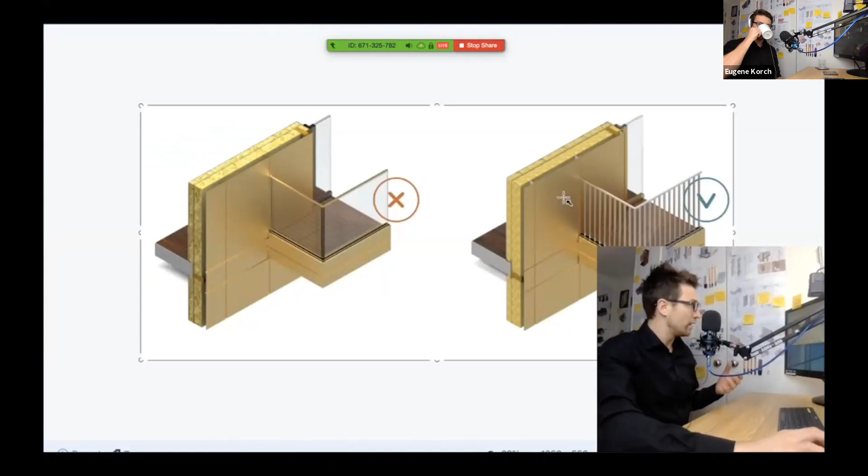Not everything about the balconies can be explained while you are standing on the balcony, but a lot can be explained via screen sharing. You see, from the legal standpoint, attached balconies are right now considered to be part of the facade. And that is why they need to comply with all the fire regulations. And that's why we don't have glass balustrades anymore. Laminated glass is not allowed, decking that can burn is not allowed, and combustible soffits are not allowed. That's why we have non-combustible decking, soffits, and balustrade.

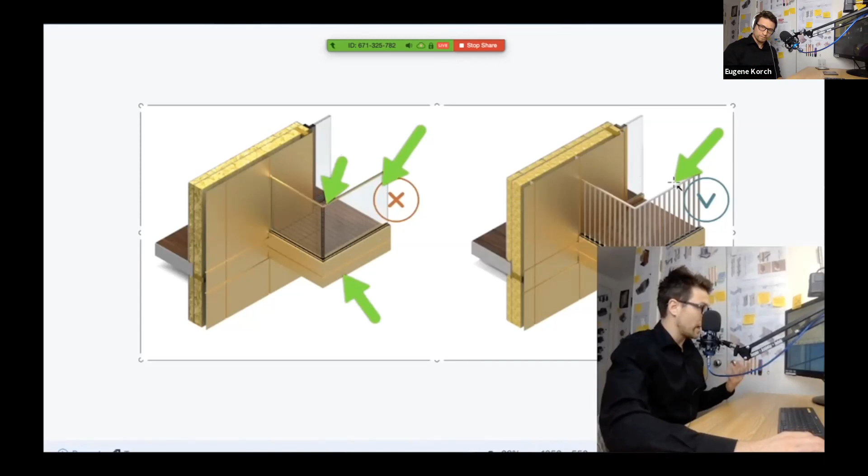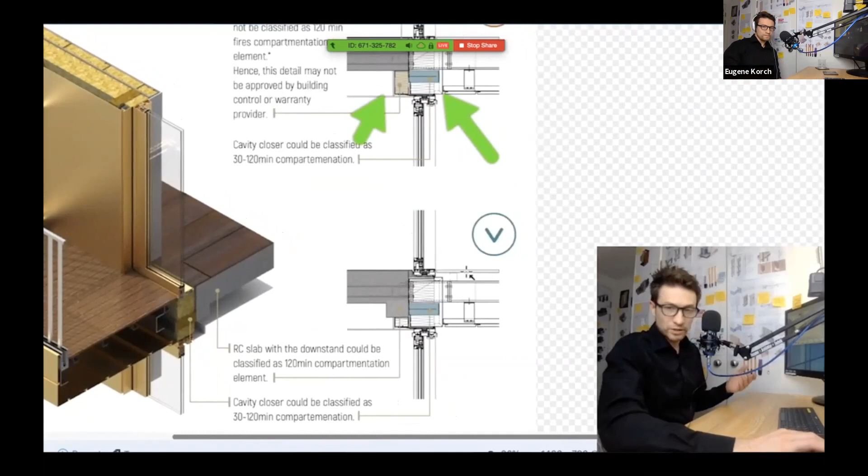But balconies also have to comply with all the compartmentation requirements. It used to be acceptable to install a cavity closer below the balcony to the SFS downstand, lightweight steel frame. Right now, best practice detail is to install the downstand to ensure the continuity of the fire compartmentation. So you can see on your screen right now the kind of widely used detail that we currently have in the UK. It's also recommended to overlap the cavity closers within the downstand zone, like shown on the screen right now.

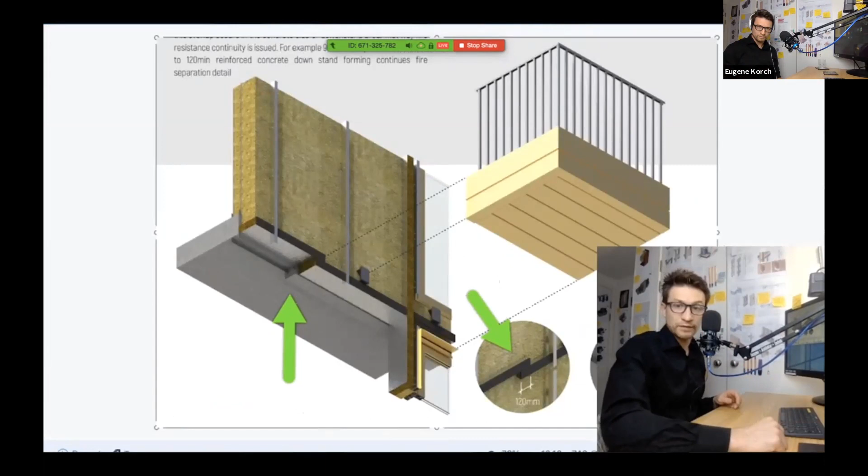Okay, so we've done a tour, we have shared screen. Let's have a test, shall we? Welcome to FAT Temporary Testing Facility.

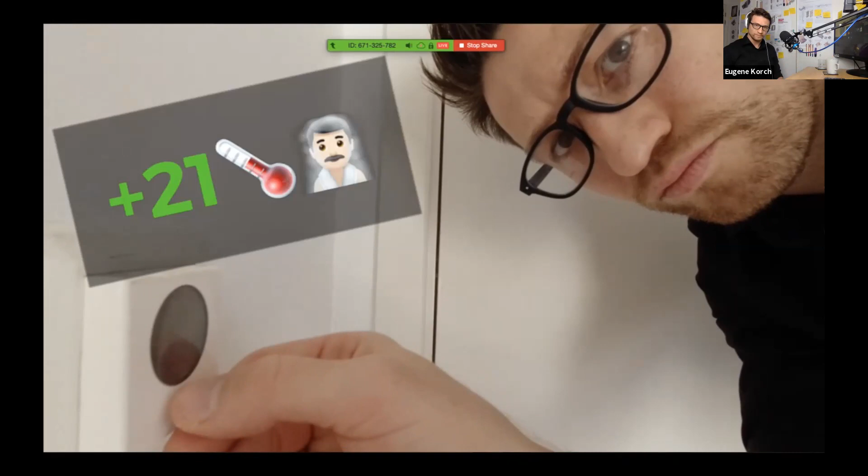So we have positioned this window in London, and we have cranked up the temperature inside to 21 degrees. And outside, as you can see right now, it's warm, but sometimes it is -2 or -4 on a frosty London morning. And we can see over here we have mold all around here, but also we can see the risk of condensation in the location of the bottom of the glass spacer.

This is a very common situation in the UK, and all the warranty providers are aware of it, and that is why there's new rules for condensation risk analysis in the UK with certain boundary conditions.

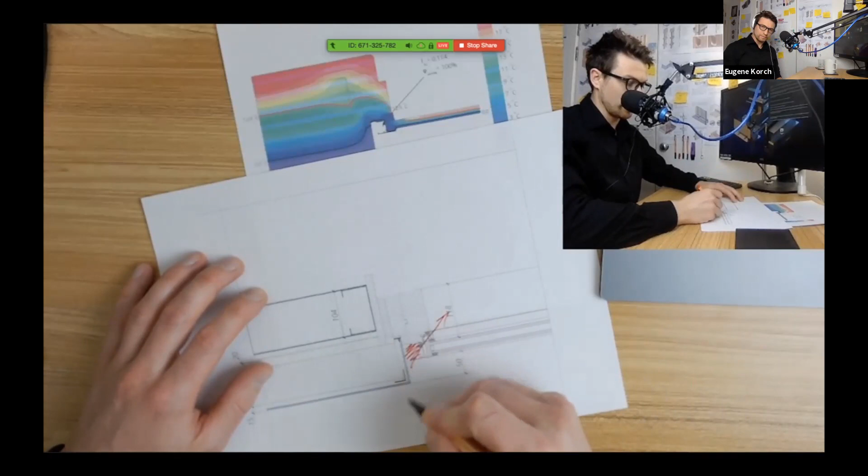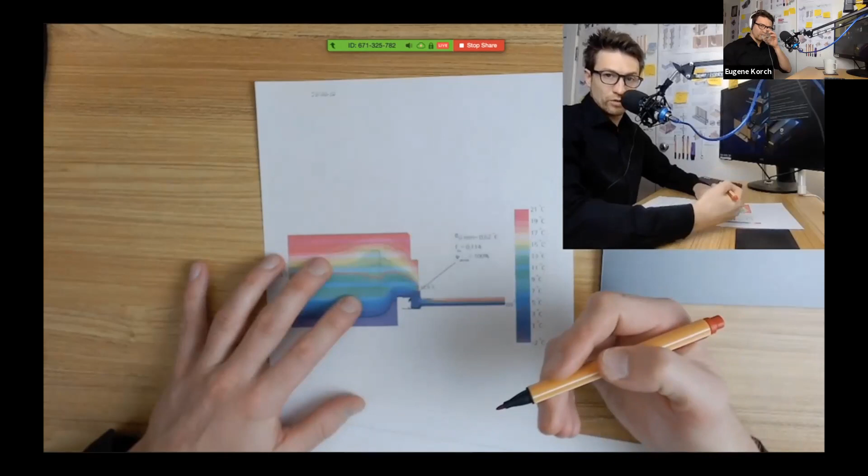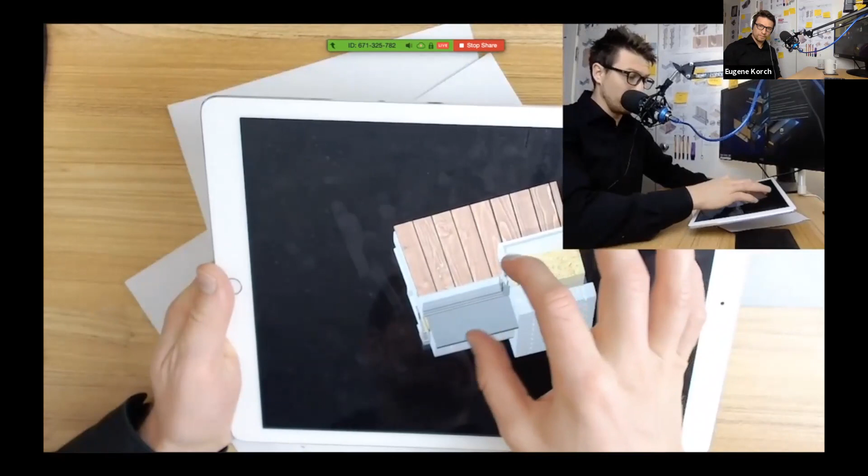And that is why the dew point is getting inside. You can see it over here. And all of that surface is compromised. There's condensation in this area over here. By the way, I'm sharing my desk with you right now, and that's one of the tools that you can do online. This issue could have been avoided altogether by slightly altering the detail itself.

As you can see on your screen right now, there's an interactive model of a similar building, but where this area was completely covered with insulation. So that's why there is no risk of condensation in that area here.

So I've done a tour, an experiment, shared my screen, shared my desk, used an interactive 3D detail, and all of that to communicate the design of the balcony, condensation and fire considerations in less than 5 minutes. The point is that you can pre-record your presentations and focus on question and answer sessions.

Hello. So basically, that was the presentation. I hope that everything was fine with the sound. Everything worked fine. Arvind can tell me if that was not the case.

So the whole idea of having the presentation in that format, of pre-recording it, is that usually it would take 45 minutes for a presenter to be somewhere on the stage or in front of a screen like that. And that will take 45 minutes to communicate a certain amount of information, even though most of the value is actually in the question and answer session.

And also, if you imagine that scenario where you're on stage and the presentation goes for 45 minutes, it's much harder for people to leave, whereas online it's less awkward to stand up and leave. Just click and let's go for the next webinar.

So that's basically the workflow: 5 minutes to explain something that would usually take 45 minutes, with the power of video. And going forward, for most people online, it will be videos, it will be 3D details, it will for sure be more interactive.

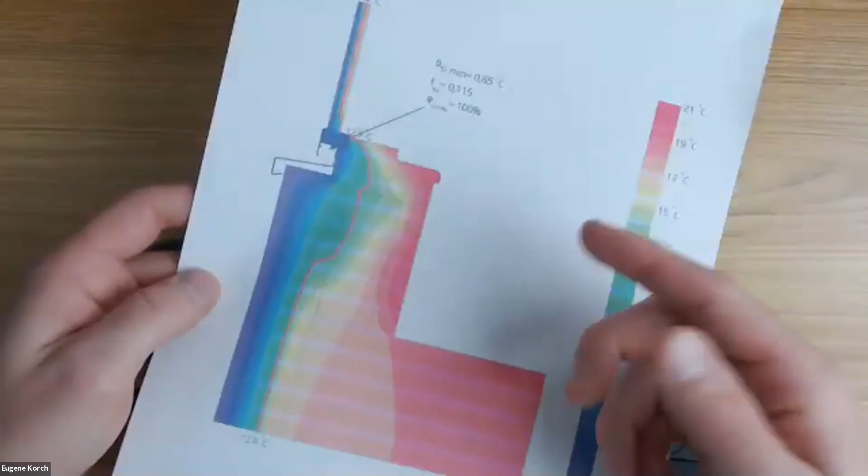So you can have something here. You can have a sketch that would explain a condensation risk analysis, the dew point, the boundary condition. You can have it in front of everyone like that. And if you're a hand sketcher, like I'm not, I'm horrible at hand sketching, you should be using something like this to communicate to people. It is very important, the type of communication. Facade engineering in general is more cultural than it is technical. And the way you communicate your ideas is very, very important.

Another aspect of 3D details would be that it visually represents all aspects of assembly to all stakeholders, and you can explain assembly quicker. It's not just nice looking images. However, that's something that people don't understand, that the way that we render them is not as important. And pretty much that's why we don't really show the entire workflow. We just show the snapshots of that workflow. For example, in that video that we have posted on YouTube, and I'll share the screen in a second.

Share screen. Sorry. Okay, I'll just switch off the sound.

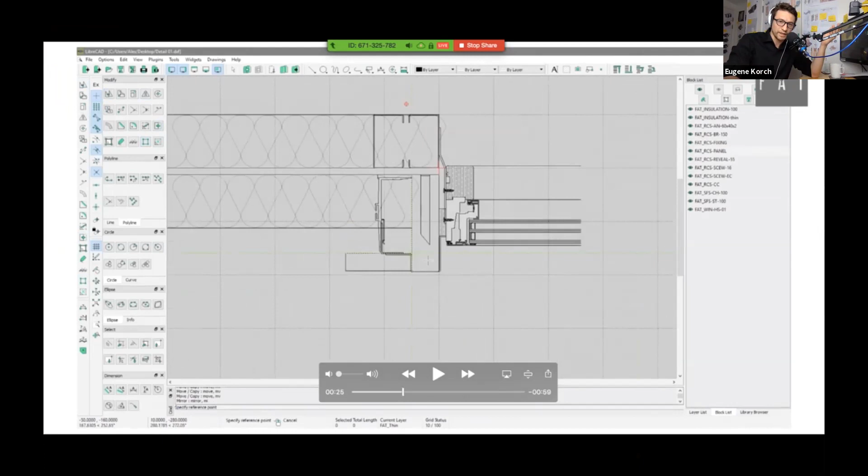There is no shortcut. If you want to use hand sketches, you can do that to test your ideas. But in general, we usually draw everything in CAD. That's always the case. That's how we think. Then basically you can design it in any software, and we'll come back to the software at a later stage when Tamas will be talking. And render packages, there's a lot of them. You can pretty much get decent results out of everything these days. We do recommend not to spend a lot of money and use Blender sometimes for visualizations, but in general that can be pretty much anything.

So that would be another question's answer. I will not answer any technical questions such as CLT and maybe the stresses in glass in this webinar. It's more about communication. But anyone can start asking right now.

So Eugene, 75% of the people have voted on the question which you had asked earlier. Which BIM software do you use? We have Revit at 36%, ArchiCAD 3%. Some people are still using AutoCAD, like you mentioned, 45%, SketchUp 5%, Tekla 2%, Bentley 1%, Photoshop 2%, and others about 5%. So clearly, the majority are AutoCAD and Revit, followed by SketchUp.

Okay, so our poll on Instagram worked out slightly different. 558 people voted out of 2,700 people who viewed. AutoCAD is at 22%, Revit 44%, ArchiCAD 20%, and SketchUp 13%. So yeah, between the two, AutoCAD and Revit, it's a split. So in theory, yes, you can do the 3D details in Revit, like we do. But I would suggest something slightly more open.

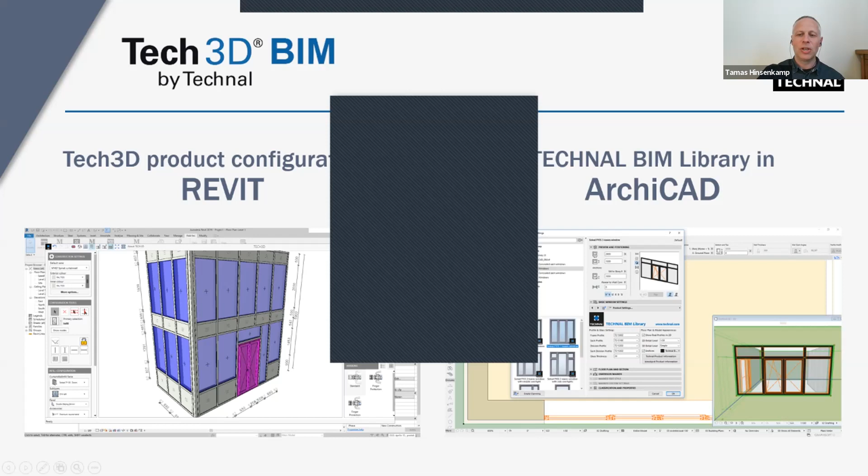Then I will show what representation possibilities there are in 2D and 3D, namely the level of detail. And then how an existing construction can be modified in Tech3D and replaced again in the project. After that, I will show how the products and the whole entire model of the building can be used in the virtual reality environment, and how this virtual reality can be used to sell flats, to show the possibilities, to show simulations, and so on. And after this session, I will go into details and show a few tricks and further possibilities of the software.

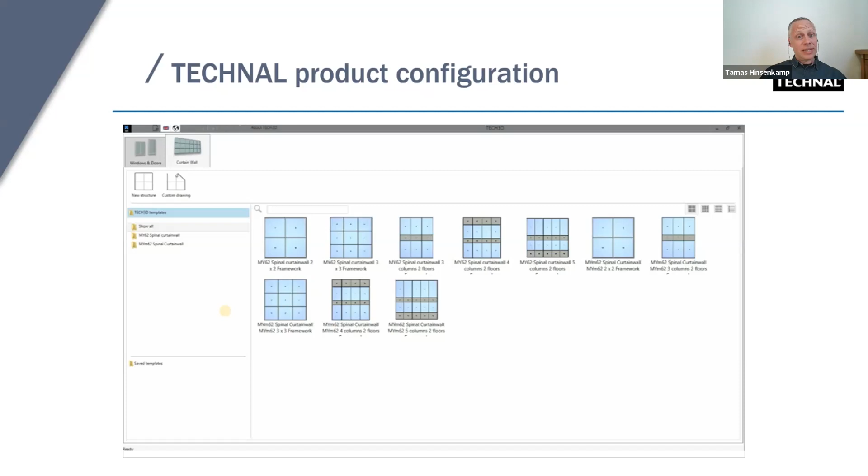Okay, and now I will start the presentation of the software. Just a few words on how this whole software started and what our original plan for it was. Tech3D is a simple configuration software which was originally planned to be used by architects. Anyone familiar with the Technal products, a metal builder or a facade designer, knows exactly how many pages the Technal fabrication and conceptual documentation contains. Across all the series of Technal products, we can talk about several thousand pages of documentation describing the possibilities, all the details of the construction, and all the options.

So our concept was that architects are mostly not familiar with this documentation and these options. So our goal was to design software that does not require as much knowledge about the products. We provide them choices one after another, and only choices they can answer. So we converted the decisions in the design process into architectural language, not asking about gasket names, profile names, and compatibility of the profiles and gaskets.

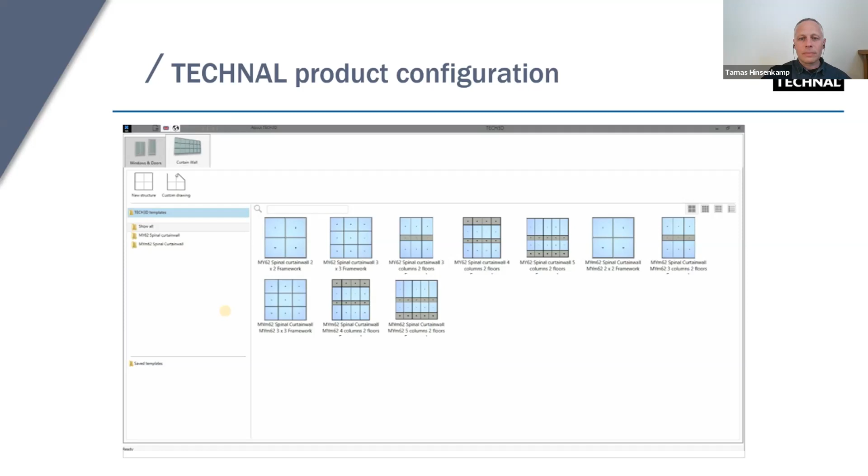So now the show begins, and I will show you the configuration of a simple curtain wall. So this is the TECH3D startup screen, the curtain wall part. Now I start a grid definition method where I enter the number of rows and columns. And now I enter the dimension of the rows I would like to modify. I can select components of this curtain wall anytime: profiles, infills, and all the other elements.

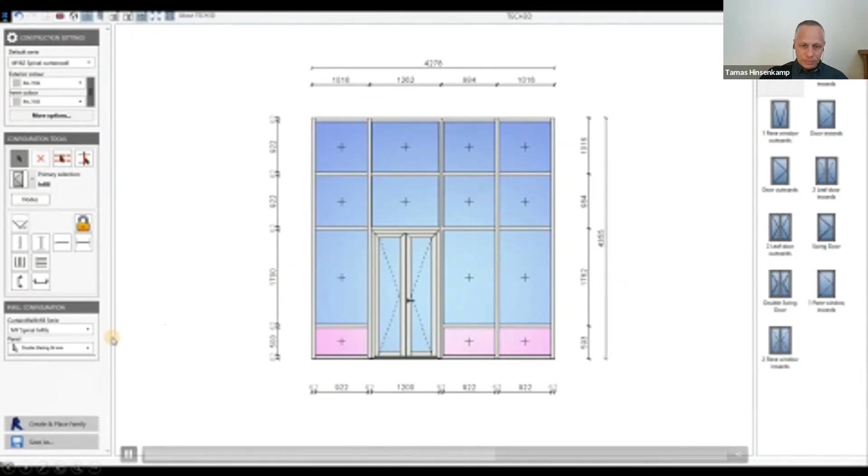And selecting it, modifying it, selecting and configuring it, I always have the choices on the right side of the screen, and I always have the possible tools on the left side of the screen. And you can see I made the geometry design at the beginning, then I deleted a transom, and then I placed a door, and now I'm changing a glass region to a panel.

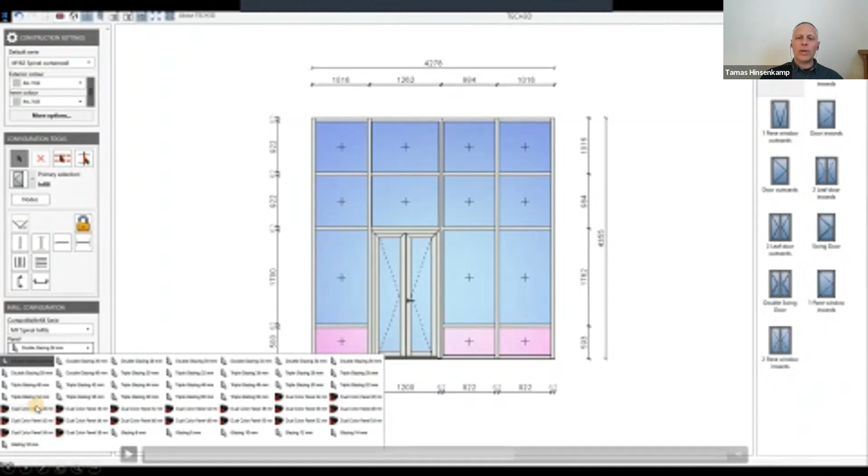At the same time, you can see also the choices of the different glass panels and also the panels. And this is the way how the construction can be closed up and modified. We always work with default values. So if you start a construction, it will be generated with default values, and these default values can be modified during the configuration.

You could see I can make selection of individual parts of the facade, or I can make global modifications. So for example, before I have modified the color of the entire facade, but I have also the possibility to select one profile and change the color of that, or change the profile reference of that cap, for example.

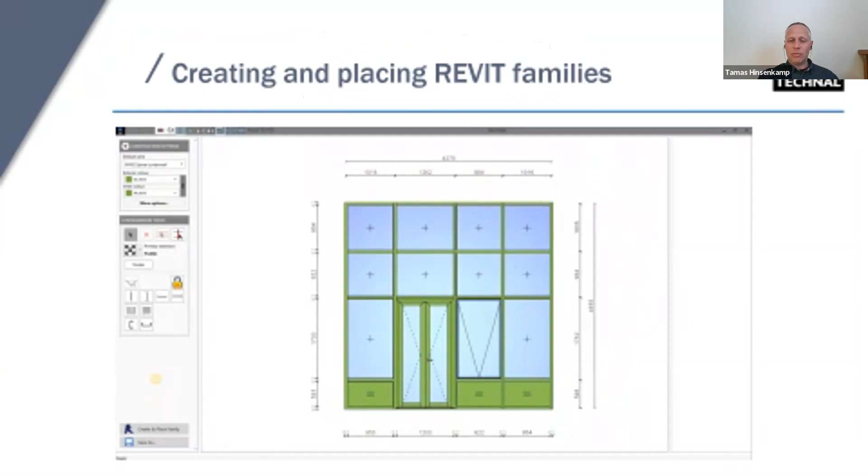So the next step of the overview is how this curtain wall will be placed in Revit. So now you can see that I finished the configuration, and now I click the Create and Place Family button in the software. And now an export settings dialog appears where I did not make any modification. I use the standard settings here. We could go into details, but I will not do it now, what others you can set here. But if you download the software, you can experiment with that.

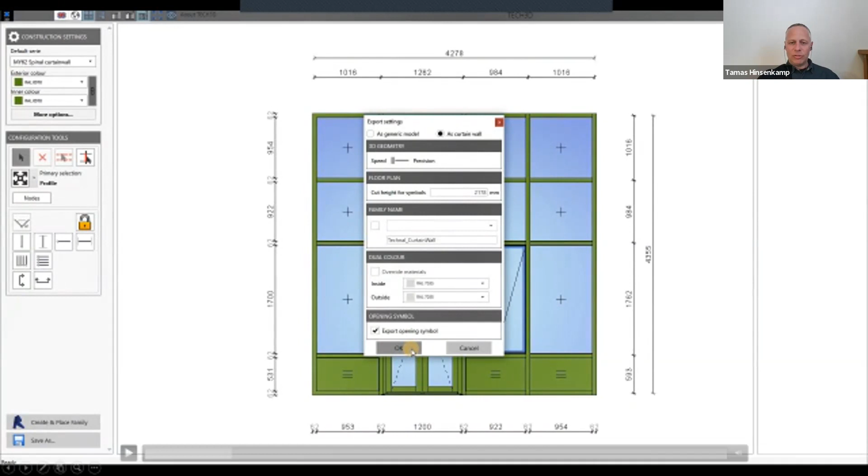So now with the place family, and then if you say OK in that dialog, then you can place this curtain wall in Revit. And this curtain wall is a curtain grid system in Revit, closed up with the Technal profiles and the Technal panels. So this is a facade or a curtain wall which you could have designed in Revit with the corresponding steps. So in the family editor, you could have created the profiles, and you could have created the panel, and you could have composed it with the standard Revit tools.

But to speed it up and to spare time, we made the configuration on the TECH3D side, and it takes time. So now this was a little bit accelerated. So placing this element requires 30 seconds or 1 minute. But at the end, this was done automatically by the software.

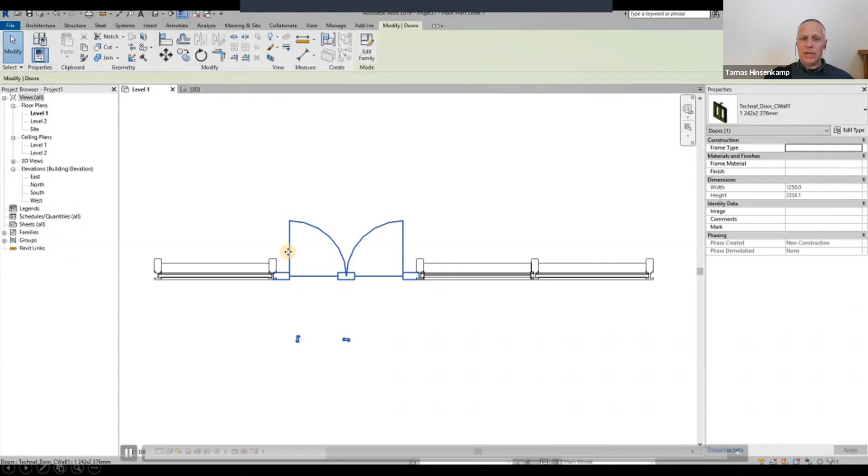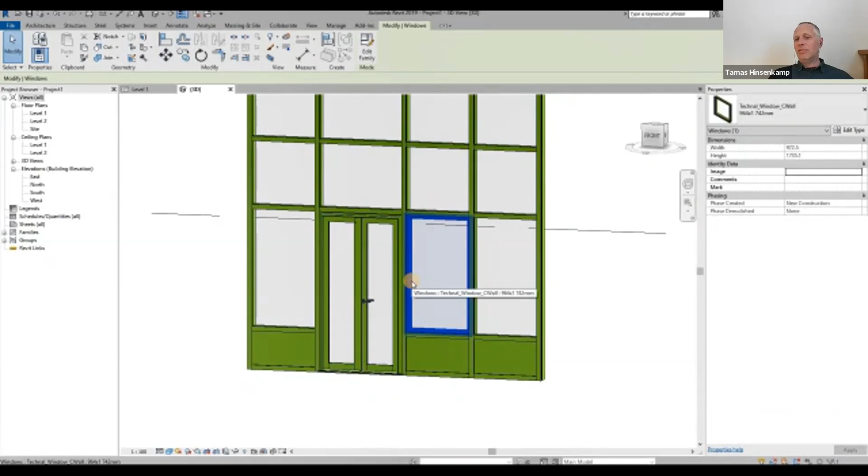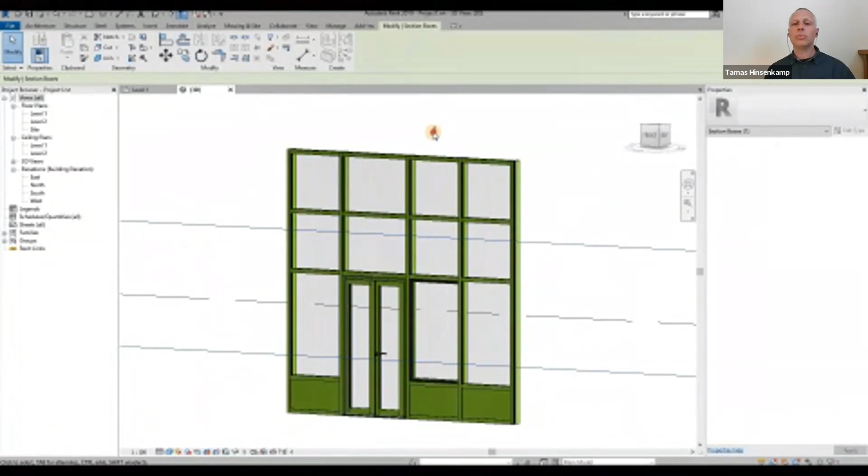You can see here that I can select the profiles, I can select the infills, and then if I go to the 3D view, then you can see that the model of this curtain wall appeared the same way as in the TECH3D software. And you can see, you can select the individual components just like they are standard native Revit components. So this was the way this construction was placed in Revit. And on the next presentation, I will show how in 3D and how in 2D they are represented.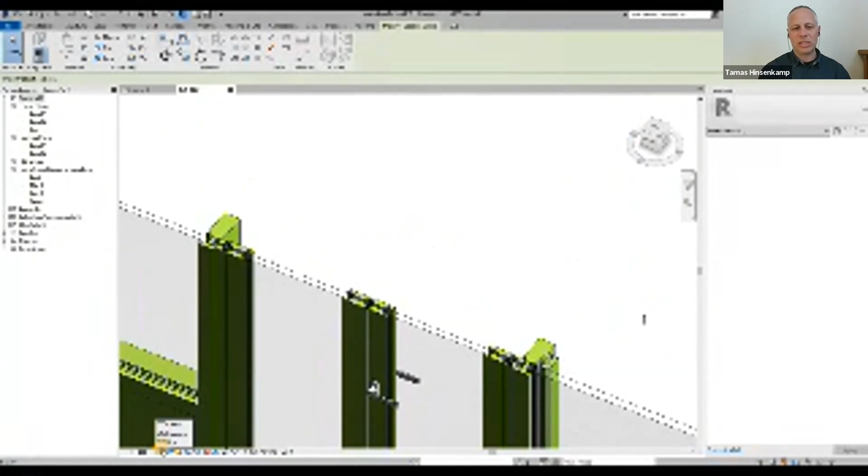So now you can see the high level of detail representation in 3D. And you can see that we do not really use the level of detail 400 or 500 here. There are limitations in Revit, and nobody is interested in the real profiles here in the Revit model. So we are trying to spare model size. But here on the 2D, we manage all different levels of detail, and the high level of detail contains the real profiles.

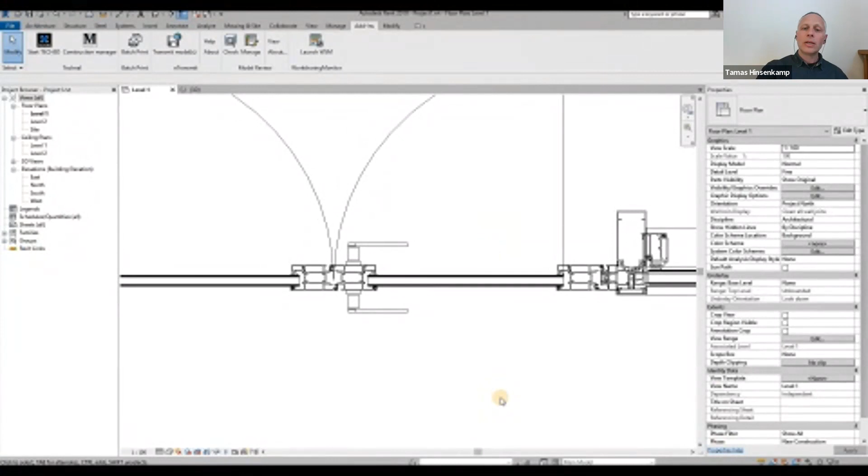So that means if you would like to see details, you have to go on the floor plans, and if you want to see the model, then we use simplified models, not to have too big families. You can also see that we have handles, so handles are visible on the high level of detail on both 3D and 2D. Next step will be how we can modify and work further on these constructions.

So now I have this placed curtain wall in Revit, and I go to the add-ins page, and then I open it again in Tech3D, and I have the same design that I saved earlier, and I can simply continue the work in that environment. So the same way I can continue selecting profiles, infills, modify dimensions. Now you could see that I have placed a new mullion, and I've modified the fields on the left and right sides of the mullion.

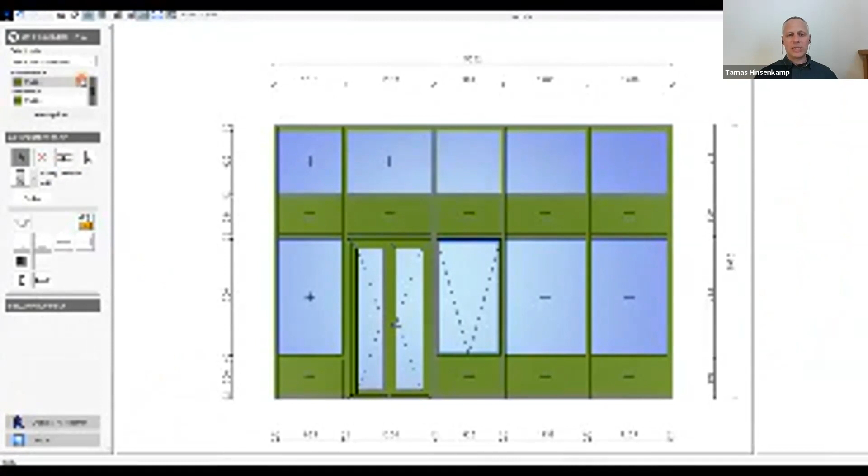So anytime I want to make a modification, I come back to the same place where the original design had been made. So now you can see a global modification. So now I will change color again. It doesn't make much sense changing it so many times. I only wanted to show you how overall modifications can be done. And at the end, you will see all the original curtain wall had been replaced, and now this new design had been placed.

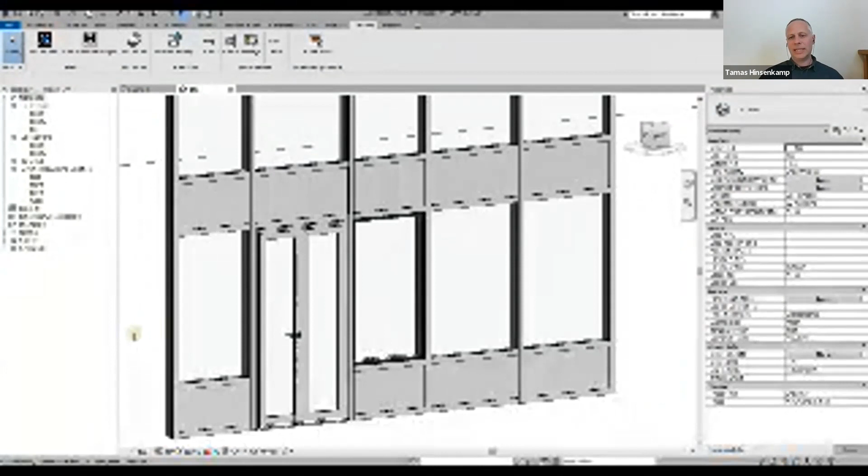So this was the modification, and at the end, you have the model of your Technal windows, doors, sliders, curtain walls. You have the whole building, and then you will have the possibility. Oops, sorry.

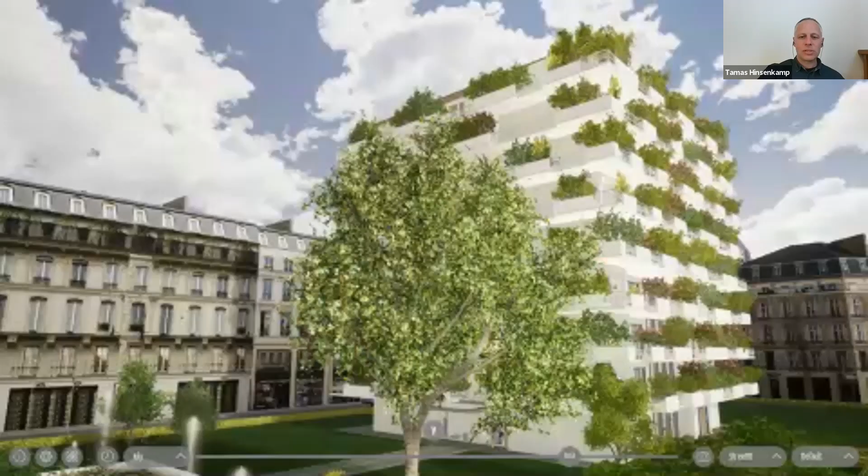Sorry for the sound. So you can see the different simulations in the model. That is Twinmotion, and the model from Revit has been saved using the Twinmotion plugin, and the BIM model containing the Technal construction has been saved to Twinmotion, and in Twinmotion the sun simulation can be done, and a lot of simulations can be done in virtual reality, and customers can come into the flats and see the spaces and walk around before buying the flats. So it is a wonderful tool to use in the sales and marketing activities of the different constructions and buildings.

So this was the concept, and now I show you some small details. Very important: what I show you here, we have a couple of tutorial videos available, so you can also watch it on the videos. You can download them from YouTube. At the end, I will show you where they can be found. You can also download the software. You can download standalone Tech3D. You can download the Revit Tech3D. All of them are free. If you download them, you can use them for 30 days without registration. And after that, you can get a free license, and you can still use it free, but without any restriction. At the end, I will also show you where to download and how to get the software.

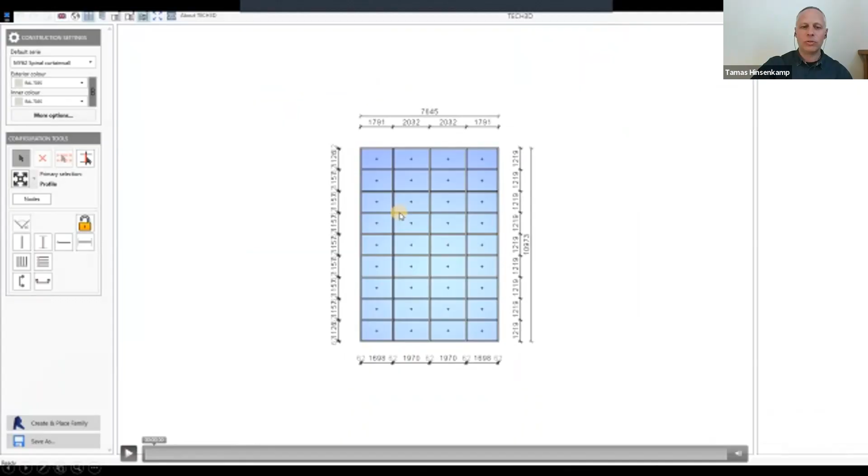So I will start the demonstration. So this is the Revit example model, and it has built-in rectangular profiles in its facade, so very simple ones. It was too fast, I go back to the beginning. So this is the Revit model with the simplified facades. And then I select an existing Revit facade. And then I launch Tech3D.

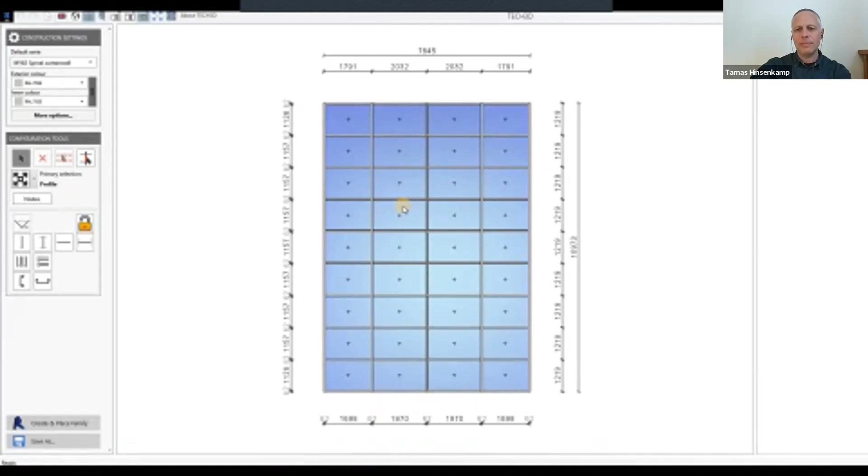And TECH3D will read the geometry of this facade and will use its default settings to place the default profiles on that construction. And now I can continue the design where the designer of the Revit model has finished. So I do not need to enter all the details here. I can use everything ready. Okay, sorry, no, I will not touch it.

I just want to let the audience know that the low resolution is only because of the bandwidth, but in principle, you would get high quality images when you're working on this. Thank you.

Okay, so here I changed the color of this facade, and I will change the cap of these mullions. I select one and use the select similar button.

Sorry to chip in, Tamas. Maybe, since it is not a continuous video, you can remove the optimization for screen and then it will be in high resolution. Okay. If possible, it will be all right. Should I share it again? Yeah. Okay, I share it. So I should remove the optimization. Okay. Yes, if we can, since it's not a continuous video, it will come out much better that way. I see. Okay.

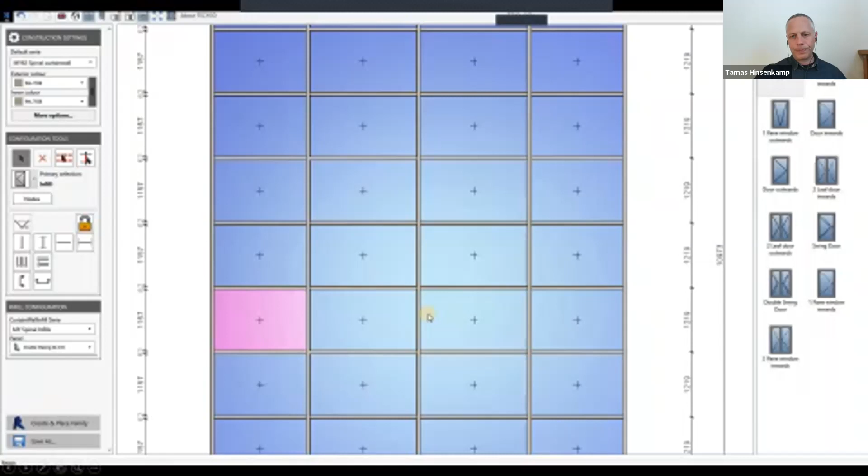Can you see it now? Oh, perfect. Absolutely clear. Okay.

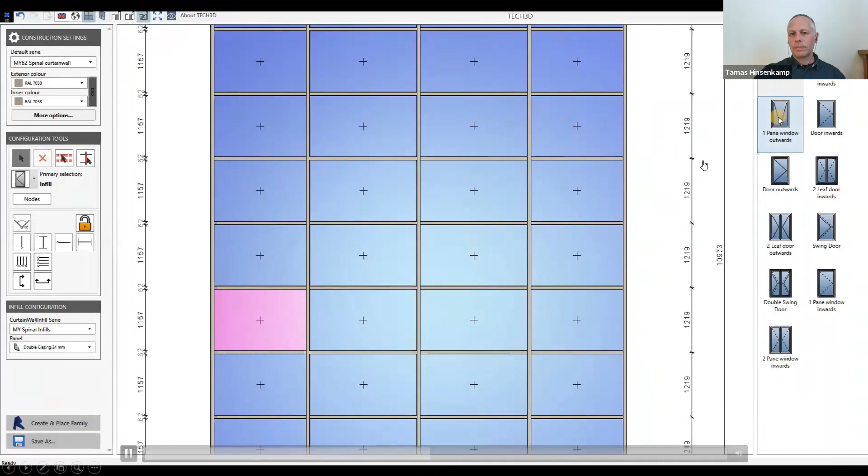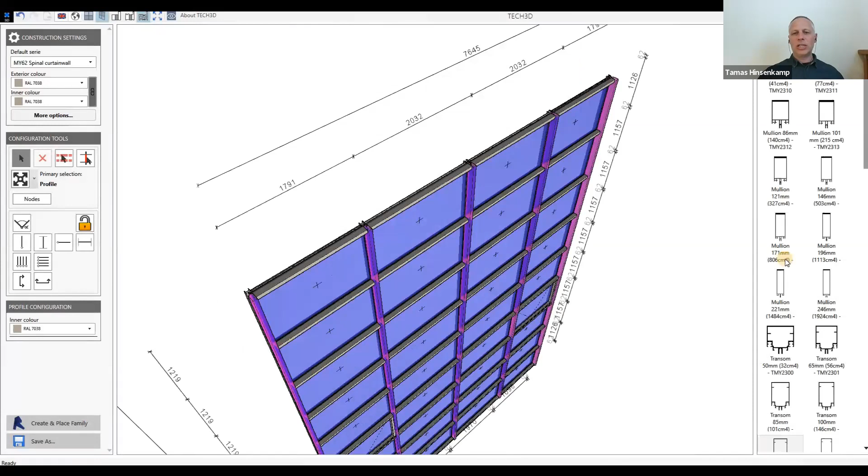Okay. So where I was, I modified the caps, and now I'm selecting fields, and I defined infills for the fields, and now I changed it to 3D view and rotated the whole construction, and now I can select the frames, and also the select similar helps me to change all the mullions at a time. So I could continue the configuration. That was enough showing the concept.

And now if I place it the same way as I did before, this facade was replaced with the real Technal components. It doesn't do what I want to do, but you can see the geometry of the caps, you can see the geometry of the mullions. So it really contains the 3D representation of the Technal facade.

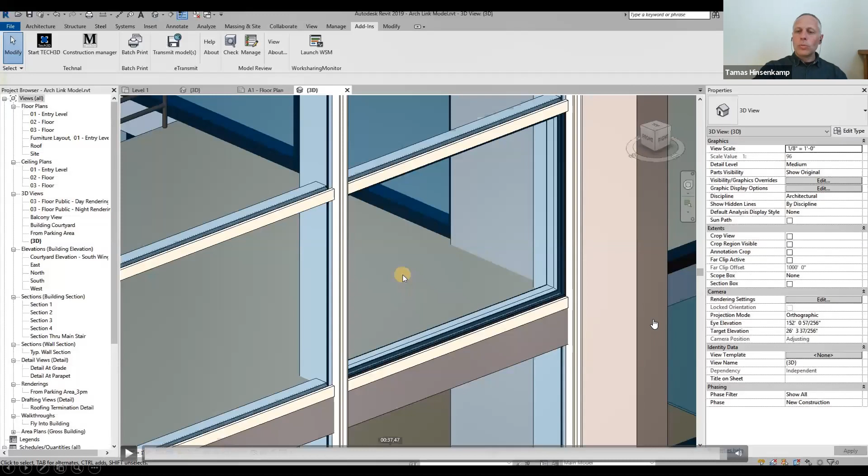So the next is to define angles in the facades. So I create a facade again, starting from the grid definition. Now I will not spend time to define the sizes of the fields. I can select the cap or the frame, and then the angle button helps me to define an angle for this mullion. And there are not too many questions here. Of course, these are very complex parts of the construction, but there are a lot of rules in the background, and we manage them automatically.

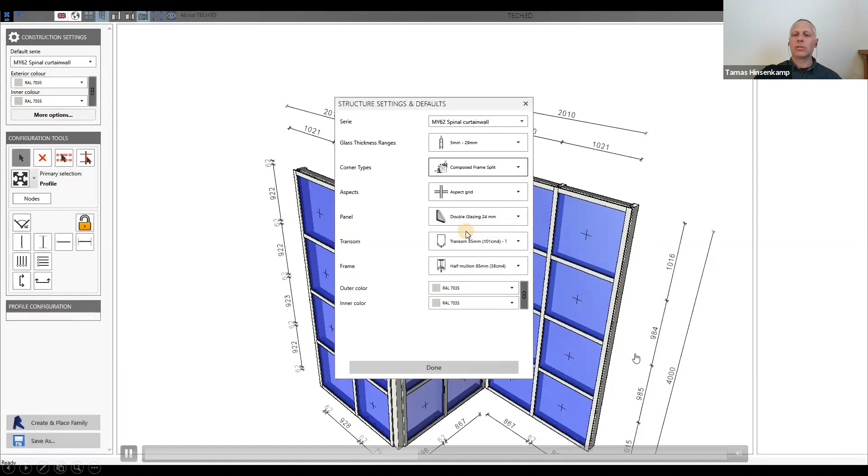The first time we open, this is in the more options, the construction settings dialog box, where you can set up a lot of defaults. Here, for example, you can define the type of the corner. You can see you have split mullions for corners, a single frame for a corner, composed frames for the corner, but you can also define a glass-to-glass connection for the corners. So these are the presets for the corner situation, and later I will show you how these corners can be set individually.

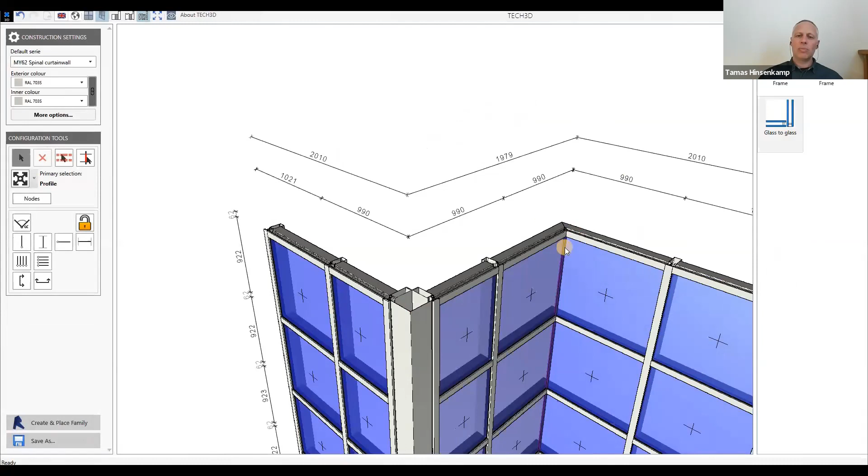So now I choose glass-to-glass solution. And if I click on the corner, now I can create a corner with two mullions or two frame profiles. Then I can select the frame profile itself and change its size, and you will see it will affect the whole construction and the neighboring infills. And this is the way you can set up your construction with default values and with individual corners and individual mullions.

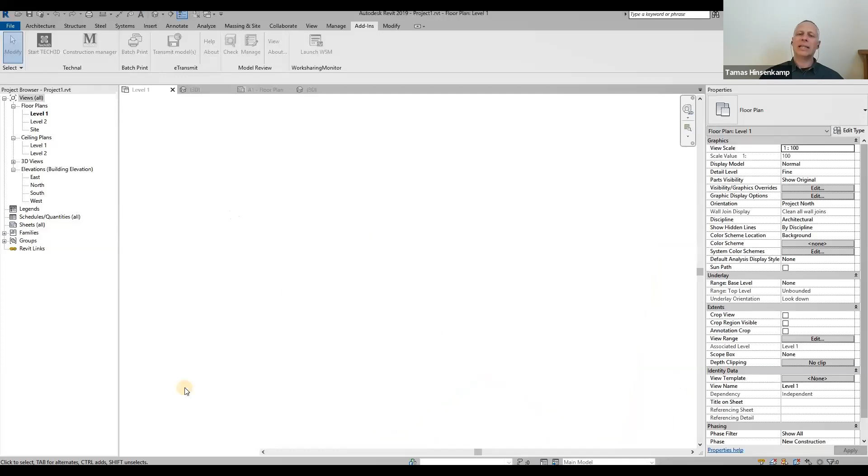So this was the way we created angled curtain walls. And here at the end, you can see this is the limitation of Revit. Revit does not support the very complex corner elements. So what we do here is that we place the standard Revit corner elements to the placeholder of the Technal corner mullions and other elements. But the situation is not so bad. This can be used for the fast design.

We also have the possibility to save our curtain wall as a generic family. And if we save it as a generic family, then we will save it with the Technal profiles, and in that case, it will be a really detailed Technal facade what we save. So although Revit has limitations in the modeling, with the generic families that you can set in the save family dialog box, you can have a model in your Revit project which is very detailed and has a very Technal look.

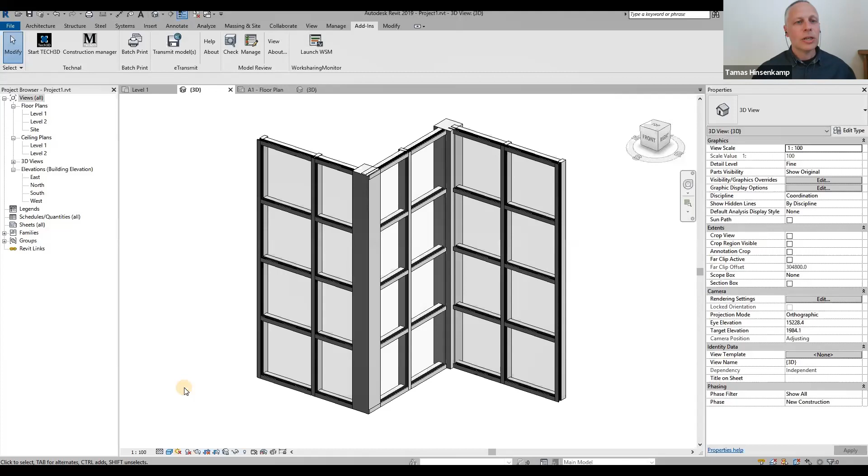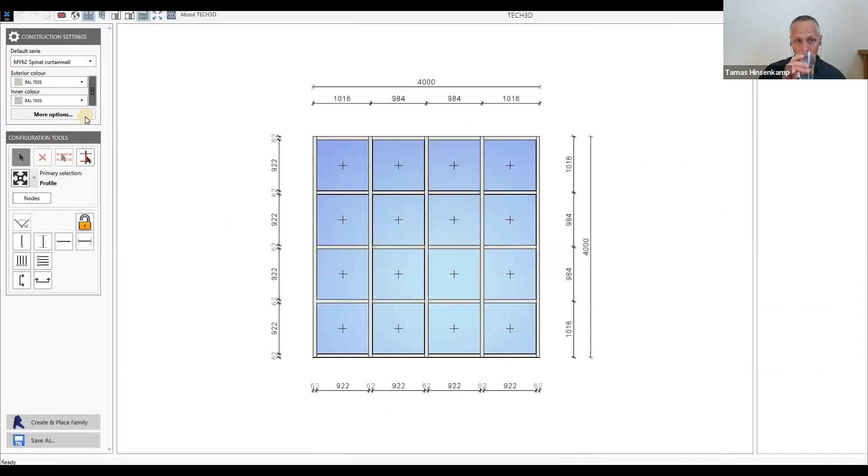So the next video is how we can manage the different aspects. Basically the default is the grid system where horizontal and vertical caps are placed with rectangular caps, but we have tram vertical and tram horizontal, or horizontal line and vertical line solutions where you can define vertical and horizontal caps as primary caps, and the rest will be quasi-structural glazing. And you have also a possibility for customization.

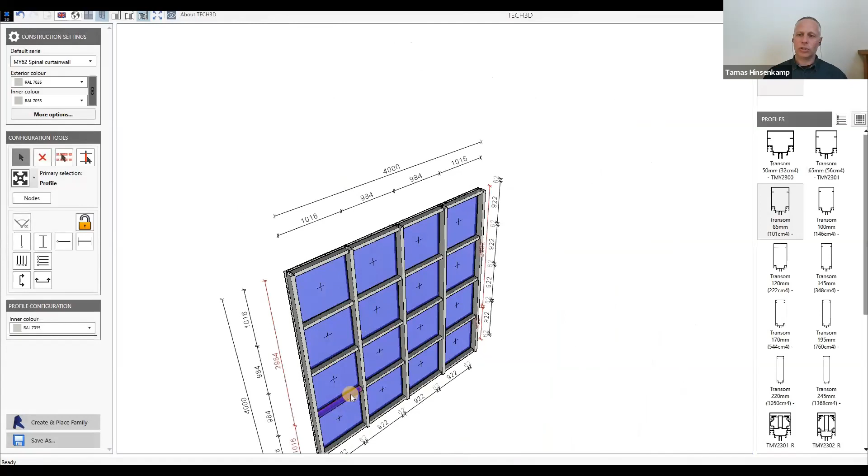In that case, you have to select the frame and you can change the cap solution to a hidden cap solution. And now you can see it's a mixture of grid system and structural glazing facades. And of course, the same way you can select the infills and configure the different applications here.

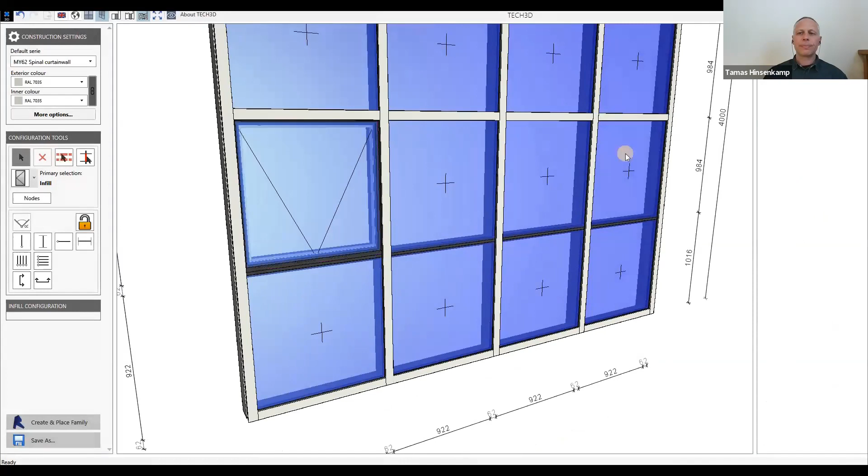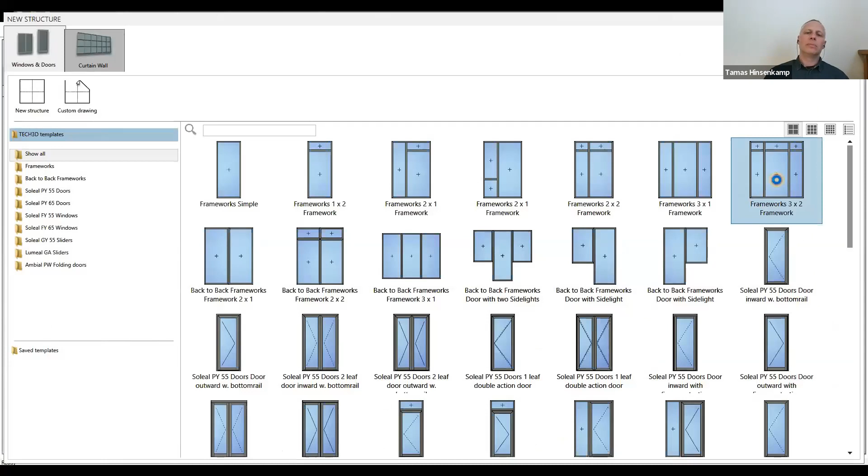So the next one will be a composite construction definition. So we will define a door construction. You could see in the beginning, we were choosing the window and door page to start and not the curtain wall page. And here with very similar actions, you can define your construction. Again, not too many questions.

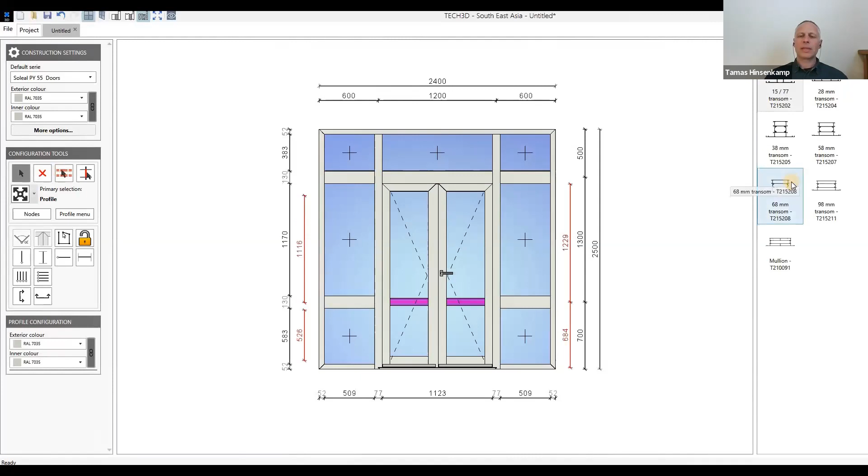You could see now I have placed a division which resulted in a transom on the fixed fields and resulted in sash divisions on the door at the same position with one single click. And now if we go on, we can change the profiles of these transoms. Again, select similar button, and now you can change the profile of it. And now I select the same on the sash division part. And now I have this construction with these modified profiles.

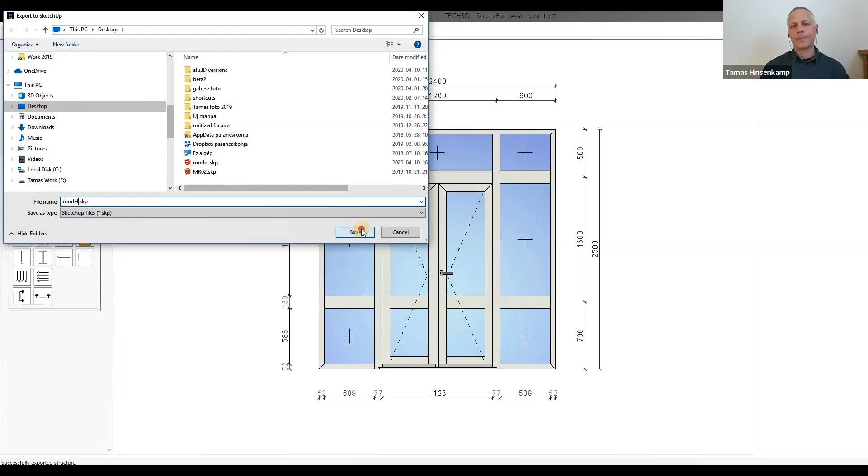And now in the next video, I will show you how this construction can be saved as a model. Now we will save it in SketchUp format, and this construction will be loaded into SketchUp. You can set the level of detail. So if you choose a lower level of detail, then of course a smaller model size will be generated. In case of high level of detail, all the profiles with the holes in them will be exported to SketchUp.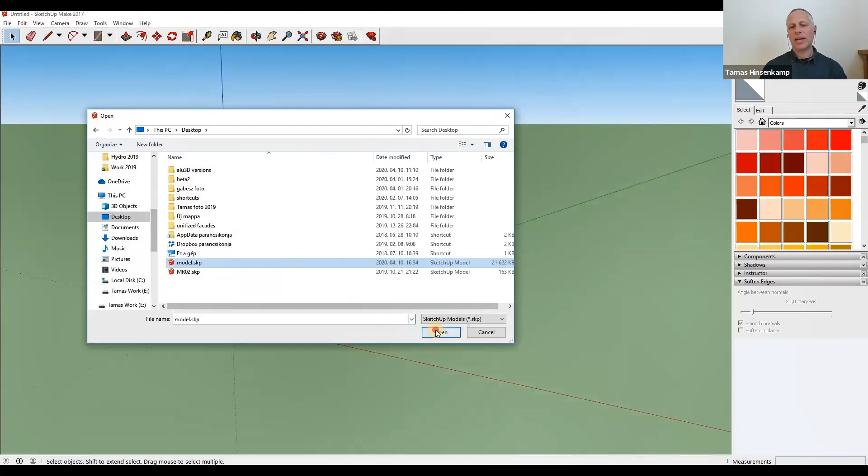And then in SketchUp, you will have a nested object hierarchy here. So you will have the possibility to modify it, explode it. So it is a quite intelligent object at the end. Just here I note that for the previous video where I created this construction and exported the model as a SketchUp file, this was the standalone version. And you could see that there is no difference between TECH3D running in Revit or the TECH3D standalone version.

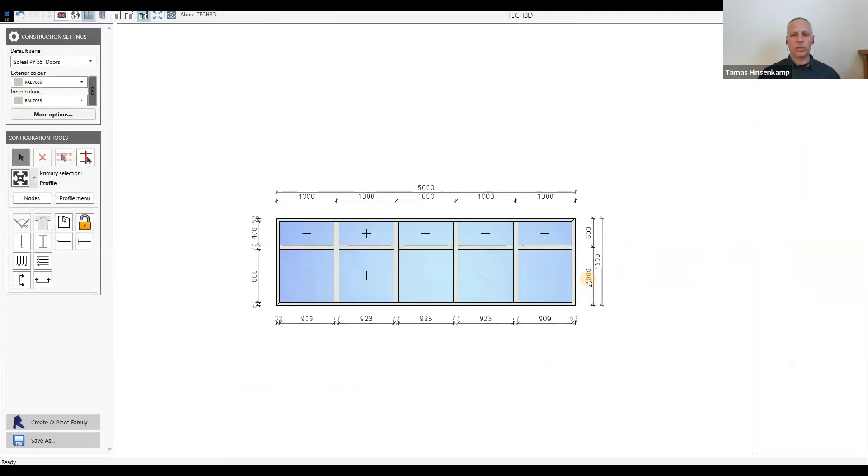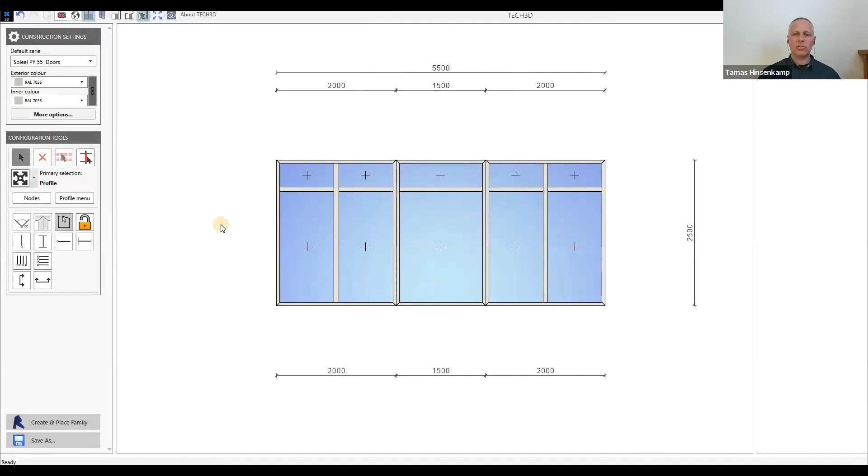And then next, detailed definition possibilities: I create again a complex construction. So it will be a shop front, which is quite big, and I would like to represent it with 3 independent constructions. So I define the sizes of the axes at the beginning, and now I change these profiles to construction boundaries, and it will generate a stacked construction. So that creates 3 independent constructions, and then I can continue the design as before.

For just a further trick, with the profile menu, now I have opened little icons on the screen where you can define neutral profiles between or on the surroundings of the construction. So in these settings, the neutral profiles are available, but the same way we can manage also trims like seals or covers or flashings.

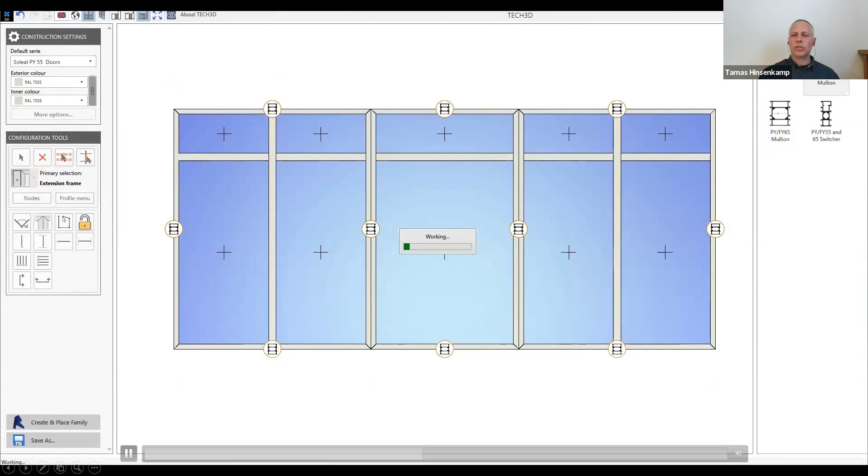So now you can see, you can select the icon, and then you will have the choice on the side, define the sizes, and also choose the right profile from the list and modify your construction. So that means although we have very simple definition methods, you can even design quite a complex construction this way.

And now I stop for a moment, so you can see the export settings dialog for windows and doors. It is a little bit different to the curtain wall. So here you can modify also the gaps around your construction, top, bottom, left, right, and you can also override the material settings, and you can export it in different families like windows, doors, or you can also create families that you can place into curtain walls.

Just a few sentences. You also have a possibility to manage the attributes. So there are some attributes that we manage automatically with the construction. These are the basic performance information of the construction. But of course, in BIM modeling and design with BIM methods, architects have their own attribute sets. So we are prepared to connect the TECH3D software with existing attribute sets that you would like to have in your families. And these sets will be placed and saved with the Revit families.

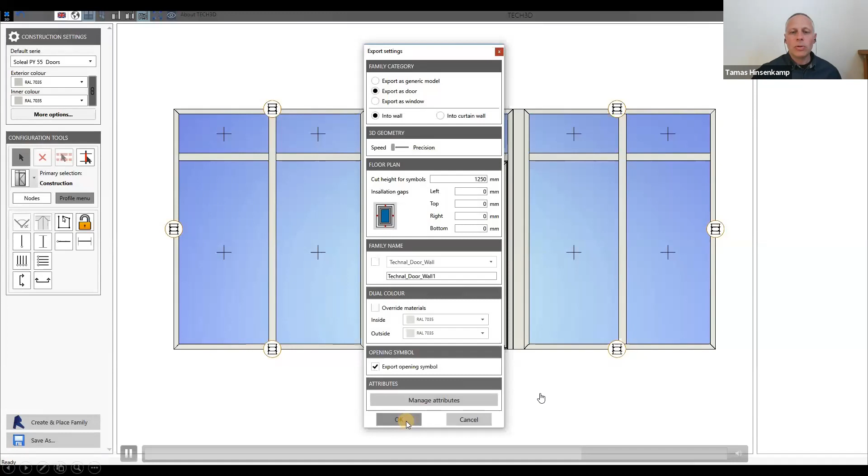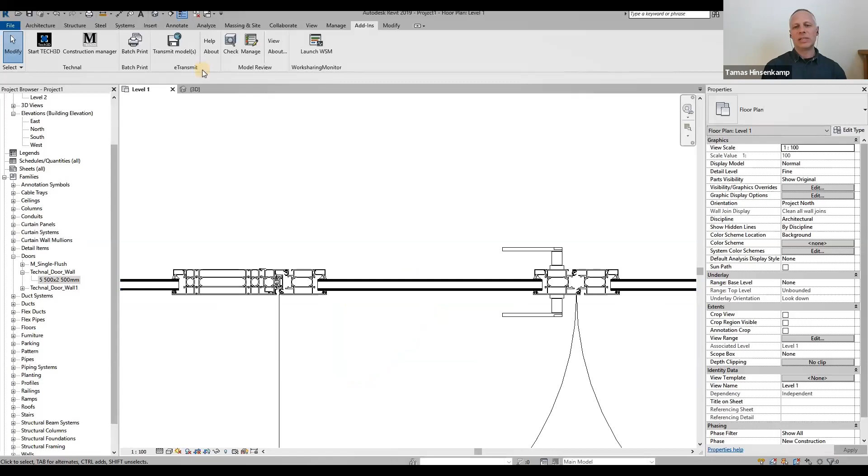And now we will place it in Revit. So now we place this door construction in Revit. And what you could see in terms of the curtain walls, now you can see in case of windows and doors. So in high level of detail, you can see the profiles. And also in 3D, you can see the simplified profiles. But the simplified profiles will still allow you to see the characteristics of the constructions. So all geometry settings and everything will be visible, which shows that it is a Technal construction.

So these were the videos for Revit, and the software has still more options that I could not show you in that short time. These videos, which we will have on YouTube, show you all the details about the possibilities.

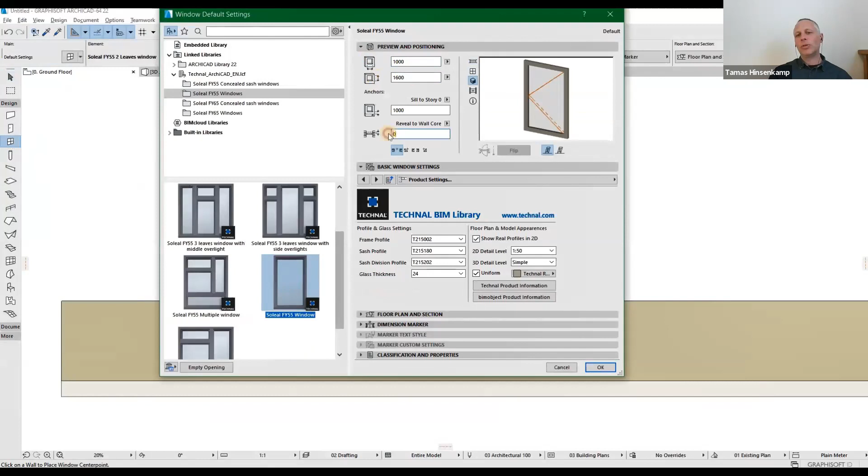So this video shows you, if you load the ARCHICAD library in ARCHICAD, what options you have to define a simple window element. So now you can change the overall dimension. At the end, the same configuration is happening here as in TECH3D, but within the standard, well-known ARCHICAD environment. So ARCHICAD users will realize that these are the standard ARCHICAD library dialog boxes, and at the end we generate a scale sensitive...

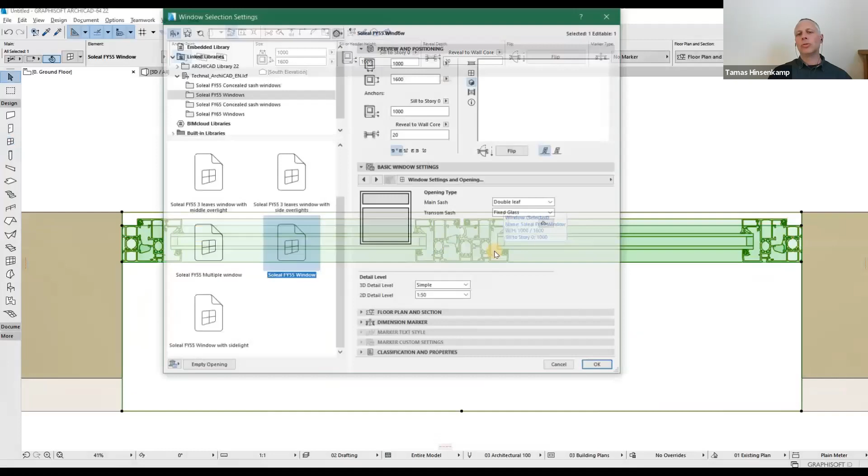I'm sorry, I was too slow with the explanation.

Here you can see that we are changing the Technal profiles in the window, the sash profiles and the frame profiles. And we can also set the glass thickness here, and the window will follow these modifications in 2D and in 3D. So the previous sentence that I could not finish was that we will generate the models in different levels of detail, which can be highlighted either with the level of detail settings, or you can also see them scale sensitive. So these are the standard ARCHICAD functionalities.

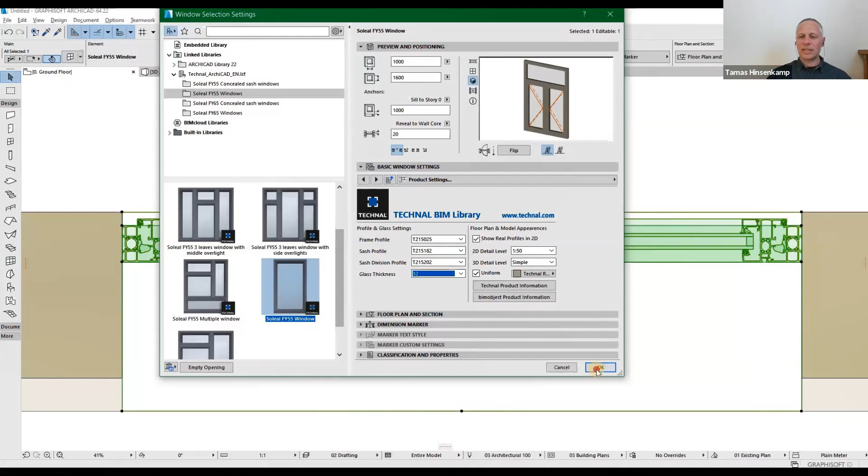So about the ARCHICAD library, I could have spoken as much as about the Revit one. It is not exactly the same, but a lot of features are available here. So please download the ARCHICAD library if you are using ARCHICAD, and you can also watch videos on our YouTube channel on how the ARCHICAD library can be used.

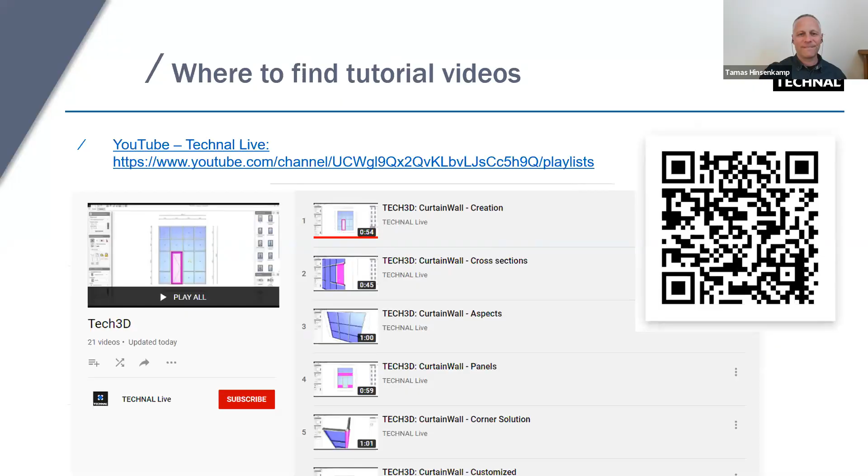Thank you so much, Tamas, for your wonderful presentation. It was really a good insight into Tech3D and the possibilities we have with Tech3D. I also have to point out that the Tech3D tool can also be used by metal builders, and it's a great tool for them to directly connect to the tech design software, which is the fabricator and metal builder software for estimation and so on. So it's a good link, good synergy and good communication between the designer and the metal builder. So thank you, Tamas, for your wonderful presentation.

Isha, can we take some questions quickly? We are just about 10-15 minutes from closing the session, if you'd like to take some questions. Hi, Tamas. Thank you so much. It was really very informative, and Tech 3D is really one of the boons of our industry. Ready designs, ready to import the drawings directly into Revit or SketchUp. So, absolutely wonderful. So, we have some questions on Tech 3D here.

Mr. K.R. Suresh is asking whether we support facade contractors in case the project drawings are in BIM. So, I think better than Tamas, Arvind can say: yes, we do support them. If the drawings are in BIM, we can integrate them into the project drawings and help them with the execution. Am I right? Okay, that was the good political answer.